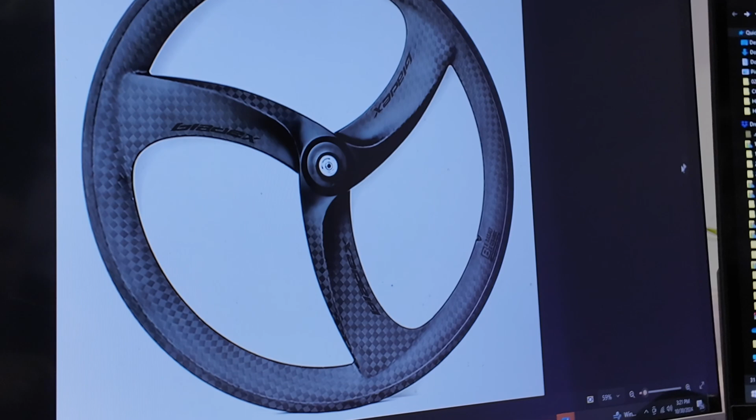We were looking at old school 3-piece designs that other wheel manufacturers have done in the past, and we had to be different. We couldn't do anything that's ever been done before. So that would look a little weird on a car. Pulling concepts from this kind of stuff.

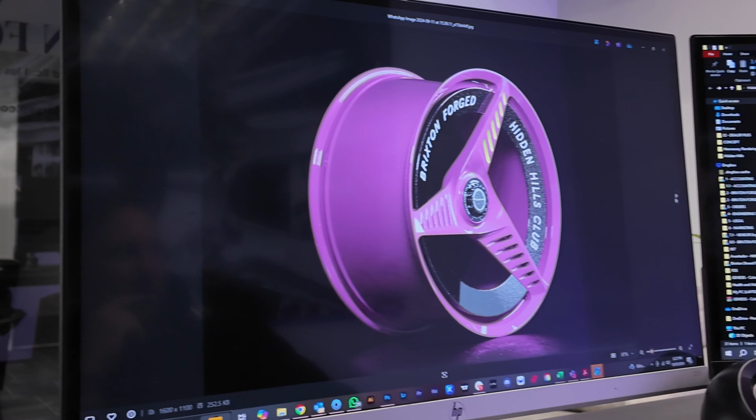And cool, then there's a Mercedes logo. Landing on something retro and crazy like this, which is definitely out there, but it wasn't quite the vibe we were going for. Looks more like a bike wheel. I'm glad we didn't do that, though, although go back, that looked hard just because of the little slits and that was cool.

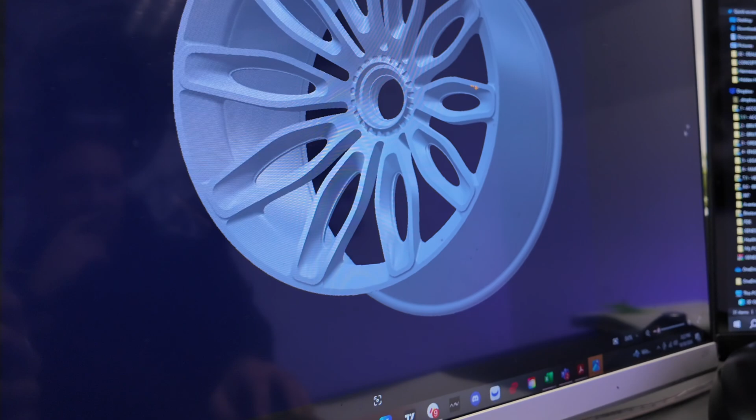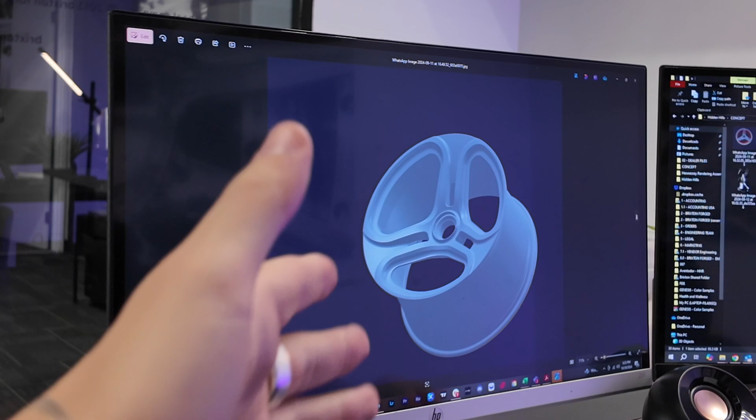So that was kind of the first thing. Continuing on, looking at some of the current designs we have and pulling inspiration from that, landing on, well, this is a 5-spoke version of it that will be released later. This is another design we've been working on as well, based off this initial 3-spoke design. Basically this was one of the wheels you guys saw downstairs, and we started with this—honestly they're sick, pretty cool, but very similar. That was my iPhone edit, but we were just starting with a base, and these are kind of similar to what people have done in the past, so I wanted to stay away from that.

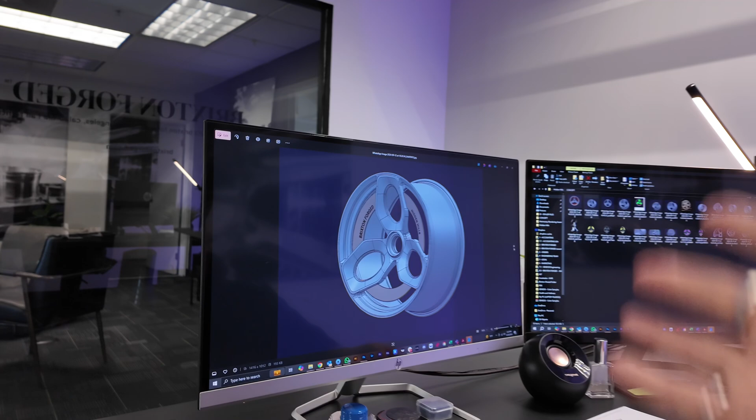Then we started looking at inspo from other Lamborghini wheels that are OEM that they've done before, and that's kind of where we got this almost silhouette from. We just 3-spoked it and it looked fire. Then how do we make it more fire? Turbo fans, aero discs, obviously. The good part about the aero disc is you could have carbon, you could have other colors, and it accentuates the car more. Honestly, when we got to this point, we were like, yo, this is pretty solid.

This was the finer details point, where it was adding fine details around the actual center lock aspect of the wheel.

But at this point, it was still kind of plain. We still didn't have any of the design elements on it. It was just still kind of a sick wheel, but still a little too plain. So we were like, how do we Brixton Forge it? Make it more detailed. So then we added those details around the center lock.

Oh, and then this is where the lip stuff came from, or the edge. That was the first one. Then we had added the teardrops.

But then I was like, yo, we keep a rule of thirds, so we decided to try to implement some sort of three, and that's like your guys' kind of signature. This is where it landed. What are they called? Slivers? Inlets? Yeah, it's just like teardrops or edge details.

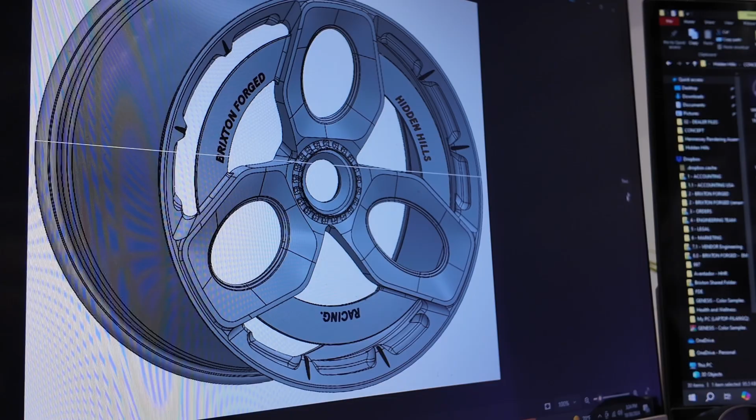Dude, when I saw this, honestly to me it looks like a centerpiece in a house. It's like a statue. I don't even think about it being a freaking wheel.

And then, you know, you guys saw downstairs basically what we ended up with. This is V1. The colors are not 100% complete on this, but it speaks for itself. I think it's pretty sick.

Do you agree? Oh man, 100%, yeah. It's gonna be sick, man. I'm excited to show these off at SEMA with you guys.

Let's run it. So basically this is the 3D visualizer that we could play with colors and stuff, and I mean, it's so sick.

We're gonna go crazy for V2, and we're just gonna change the entire face of the wheel, but we can't show you what it is yet.

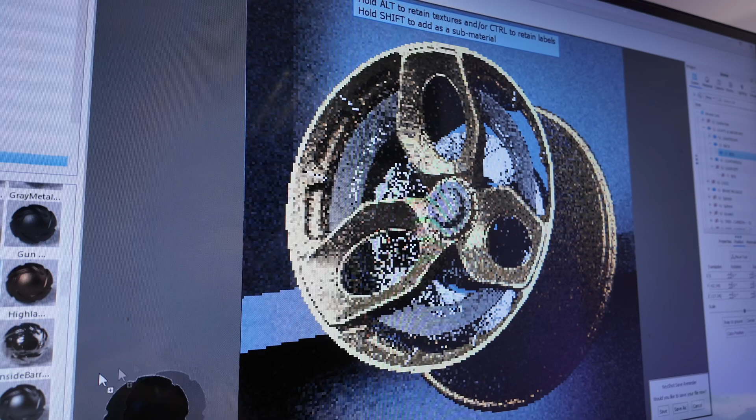Ooh, do that, what is that chrome color? Oh, that's sick. Honestly, all of it is sick. That blue was sick. Ooh, stop.

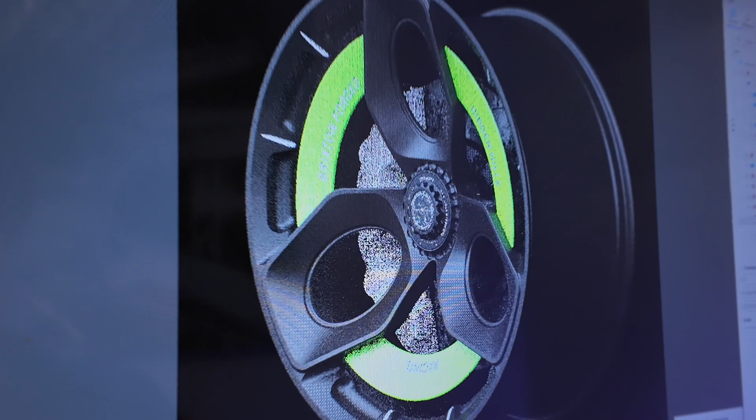Guys, put these on your cars. If you have a center lock wheel on your car right now, you need to put these on it.

I wonder how these would look on like a GT2 RS. Fire, or you think no? It's too different, it's tough to say. I think they're too purist.

Hey guys, I think this new line is gonna be pretty sick. We'll just wait to see how fast it gets copied. Oh yeah, cause...

We're breaking boundaries right now. No one's done this yet. It's only a matter of time. I mean, we started with that, and then everybody copied that, and now we're here. It's only a matter of time before that gets copied too. But we have proof that we did it first here.

That's true. What's the date? That's it, yeah, right, date it. We have to backdate it. We did this before October 2024. So yeah, show us receipts. Show us receipts if you did this before us.

But I think this conversation, actually, I'll give you an exact date of when it started. I honestly can't wait for this to come together. It happened on September 11th. All right, September 11th, but from New York too. It's okay, it's all right, it's allowed. Yeah dude, and we made it happen. Yeah, we made it happen. That was as cool as it is.